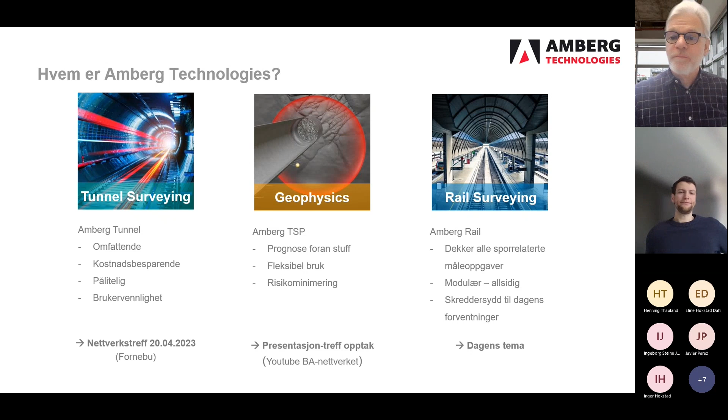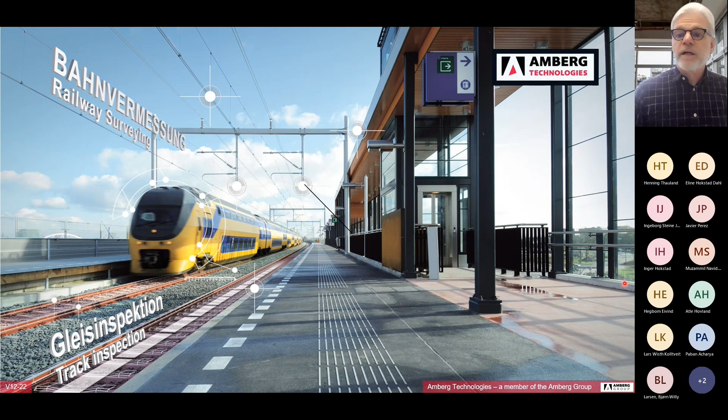I will share my display with you. Today I'm going to present you... I hope you can see what I can see. All good. I just quickly want to switch off my camera to save a little bit on the connection. Yes, here we are, perfect.

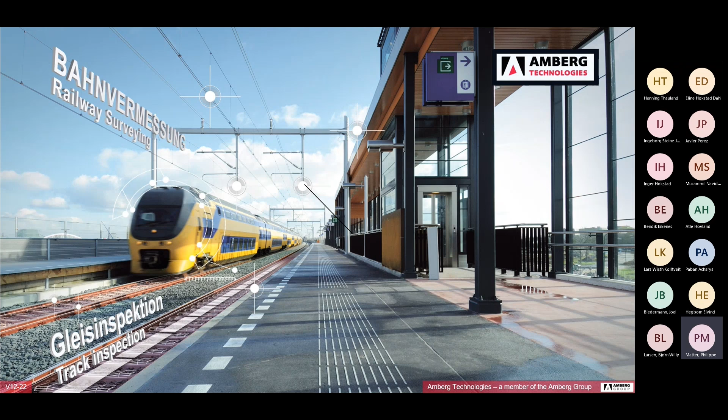Welcome to Amberg Technologies. Today, like Joël mentioned, the topic is rail. Rail survey and track inspection tools from Amberg Survey, from Amberg Technologies. Amberg Rail means better track performance, less maintenance, and subsequently saving money. I'm going to show you a few applications which I believe are relevant for Norway.

I'll dig right into it. Just to give you a quick background of Amberg Technologies, we were founded in 1966 by the senior Rudolf Amberg, now led by his son Felix Amberg. You can see we have about 20 years of history in track and track inspection, track maintenance works.

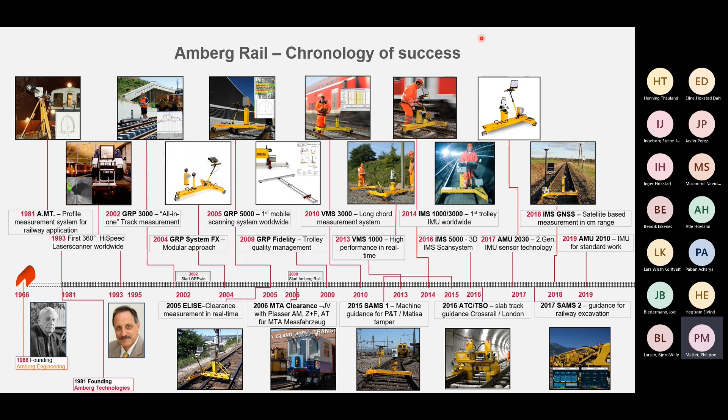How does it look? What is our offering for the market in rail? Here we go, so let's look a bit. It's a bit, how should I say it, it's complex here in what I show, but I will go into each detail.

We have two parts. We have our GRP, which is a track trolley, a track measurement system, which can perform various applications such as survey, tamping applications, clearance, and inspections. We have a platform called Amberg Rail, which is the application where everything happens, the Holy Grail. We'll see what it is.

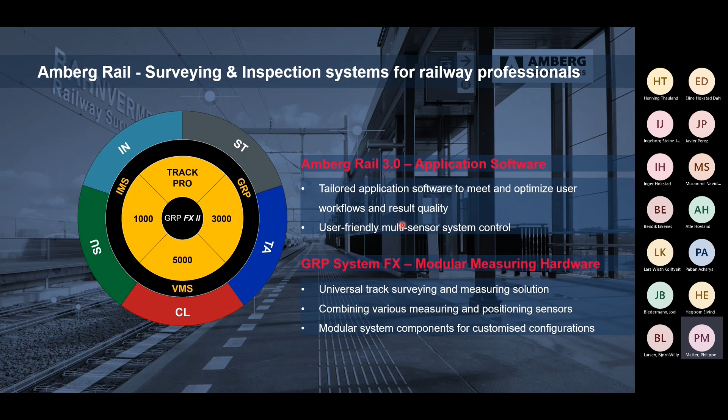And then there's the system called GRP-FX, a modular hardware measuring system. This is the way it looks. We'll go into more detail about the module. It's modular, our hardware part is modular, it's scalable, you can upgrade it, and it's been proven for over 20 years. We have constantly innovated and adapted all the hardware components and firmware at the same time.

On the other hand, we have Amberg Rail, like I mentioned, it is our software platform. Amberg Technology is predominantly a software company. Yes, we need some data providers, which in this case are our trolley with all the sensors, plus total stations and GNSS from Leica Geosystems. We can exclusively only work with Leica Geosystems, meaning the Leica total station will transfer the geodetic information directly to the trolley. So that's about the data providers.

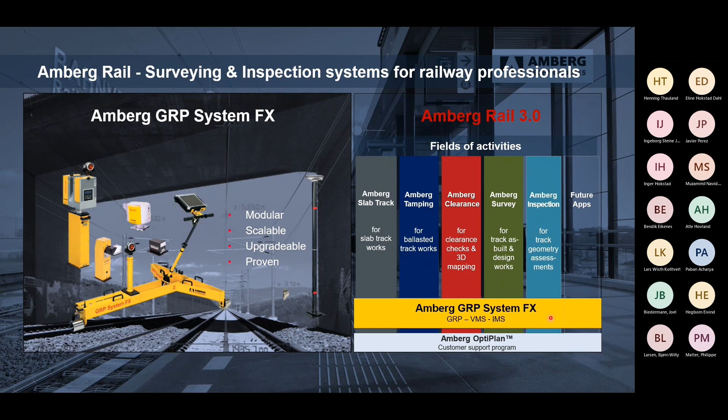Back to software, we have a software called Amberg Rail, which has various applications, and the various applications will result in various configurations of the trolley. Let's go quickly into these individually.

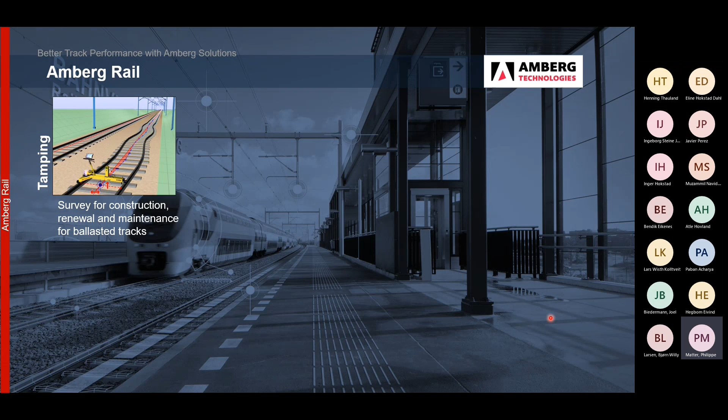So Amberg Rail, we have tamping. Tamping is most probably one of the classics in Norway, and not only Norway, but around the world. There are many thousands of kilometers of tracks which are ballasted tracks. Ballasted tracks need regular maintenance. So we have an application called Amberg Tamping. It's for construction, renewal, and maintaining ballasted track. The trolley will look approximately like this.

We'll go a little bit more into detail on each of those applications. Then we have slab track. Classic slab track is used in the Follo Line tunnel. Normally in today's tunnels you don't put ballasted tracks because it's a bit difficult to maintain ballasted tracks in a confined space such as a tunnel. So therefore you tend today to go for slab track. Slab track's big advantage is you don't need a lot of maintenance, except the rail head needs to be checked once in a while. Eventually you need to replace a rail, but basically a slab track doesn't need maintenance over several years.

So we have a slab track application for surveying, and of course to lay the tracks, and for maintenance work when you replace a track or a rail, for example. A typical configuration is our GRP 1000. We'll see that a bit later.

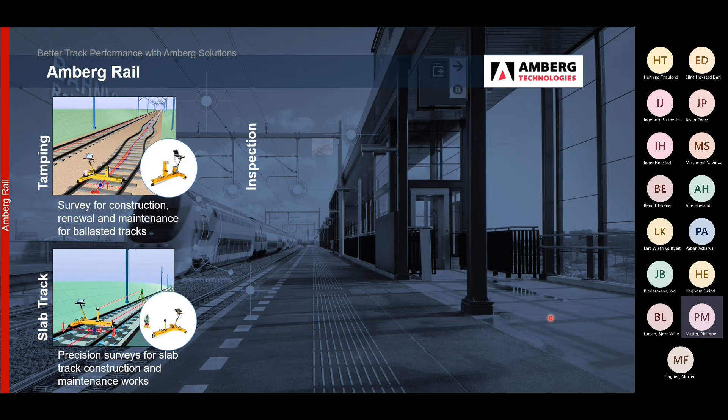The next would be inspection. Inspection is classic, it is for track geometry. Here we only assess the track geometry. It is used to plan a new track or to assess a track when we don't have any information about it. So it's classic inspection, we'll see that a bit later. Here a very basic configuration - it looks basic, it's not as basic as it looks, but we'll come to that later.

Then we have survey. This is classic 3D, now we're talking geodesy. We want to know where does the track lie, where are all the encroachments, where is that pillar, where is the bridge starting, etc. So it's to plan and for site preparation - for example, for a track or a tamping job, you want to do a survey before you then do the tamping job. And last, but most complicated, that's a typical configuration.

And last is clearance. Now we're talking of a series of sensors, of captors. It's for mobile 3D scanning, documentation for BIM, clearance gauging, etc. That is basically the heaviest configuration, and it is dedicated to clearance, measurements, and mapping in tunnels or along the track.

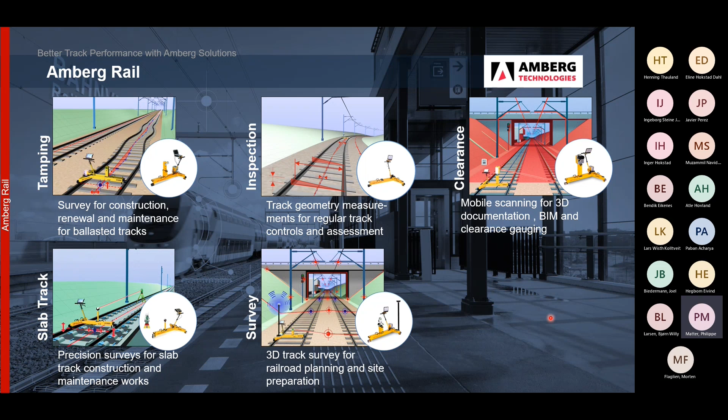Now, going back to measuring the platform, the multi-sensor platform. This is the base which is relevant for all configurations and all applications. It's the trolley, which consists of a central sensor board, which is somewhere in here - you don't see it. It has an odometer, which is placed here, and it has a gauge measurement system which is highly precise - the gauge goes plus minus 0.3 millimeter.

And the next would be a cant sensor, which can do a cant super elevation of plus minus 10 degrees, which is relevant to plus minus 260 millimeter, at a static accuracy of 0.5 millimeter and kinematic accuracy of plus minus 1 millimeter. So this is the base of all configurations - all these sensors are always active and taken into consideration when you do any survey on the track.

Now we need to configure that a little bit. Oh, of course there's a battery system - of course everything needs to work independently. We can take the power from above, but many lines are diesel, tracks are not electrified. So yes, we have an integrated battery system. We'll come to that right away.

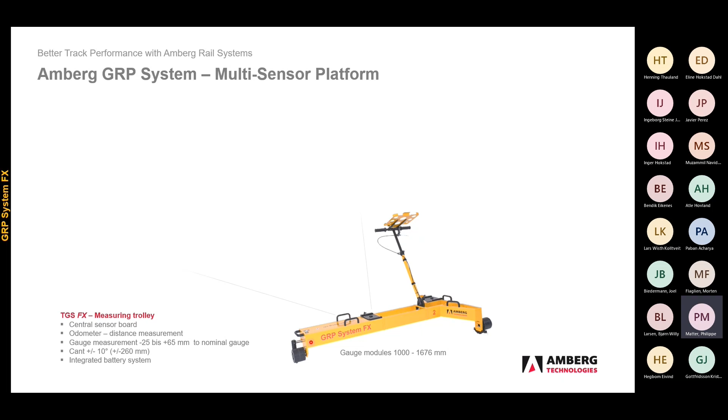Now, take for example, we have several add-ons: a prism column, a profiler, total stations with automatic tribrach, a battery system for the various scanners. So we're talking scalability here. Depending on what kind of job you need to do - for clearance, clearly you can do it with a profiler, but if it's a long tunnel you'd rather go for scanners. And as I said, you need to be independent, so here we have a battery system which feeds these scanners and gives an autonomy of approximately 8 hours.

Next to all these sensors, we also have the so-called AMU, Amberg Inertial Measuring Unit - we'll see what that adds to the performance of the trolley. Again, you can configure this part and add it onto the trolley when you need more performance. And of course, if you have tracks laying somewhere in the prairie with absolutely no control points, you have no idea where it is, you can use GNSS - compromising on accuracy, though at least you get a 3D information of where this track lies in the prairie.

Just to complete, we have different wheels, including tram wheels used for trolleys in the city. Tram wheels can't be that size because they're mostly embedded into the tarmac on the road, so we need smaller wheels.

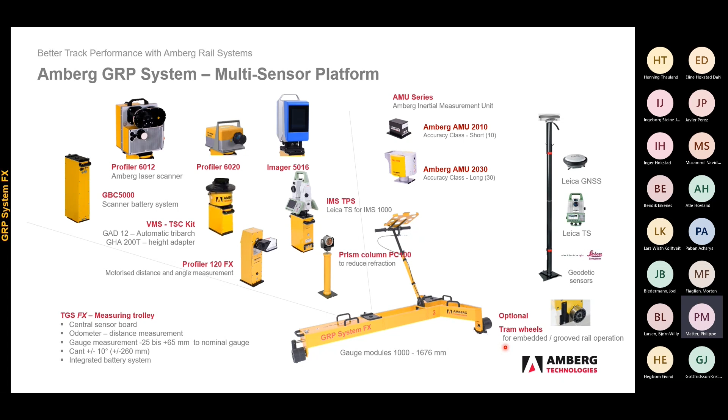We also have stainless steel wheels, typically used when you lay a slab track, because the rails are still rusty and polyethylene wheels would wear off too quickly. So we have a full set for all applications, whether it's rail or tram.

How does it work and how is that workflow? Just schematically, a small workflow: you have one computer, basically the same computer for everything, for the preparation, where you prepare your project.

In this preparation stage, you have several input features where you can input land XML, your alignments, previously acquired data of the track, or planning data for a new track—how it has to be laid, especially for slab tracks and ballasted tracks. Once everything is prepared, you move over.

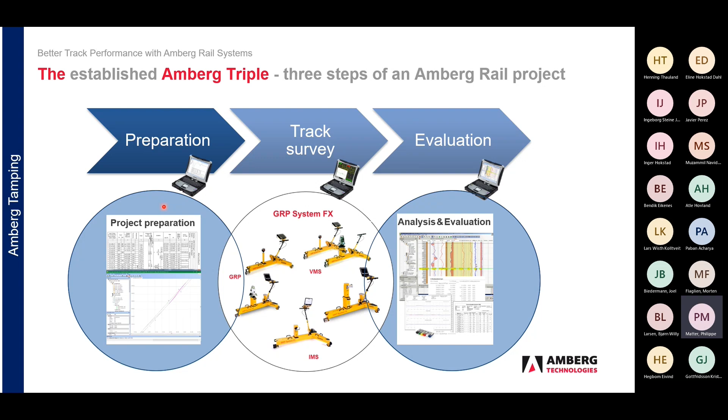You go from an office survey environment onto the track, into survey mode, on the very same computer. So we don't have to juggle data back and forth—the data is always on the same computer.

Here we have a simplified graphical user interface. A user is guided through the setup of the trolley on the track. Considering the job, you choose the respective job and then start your track survey. It's all icon-based.

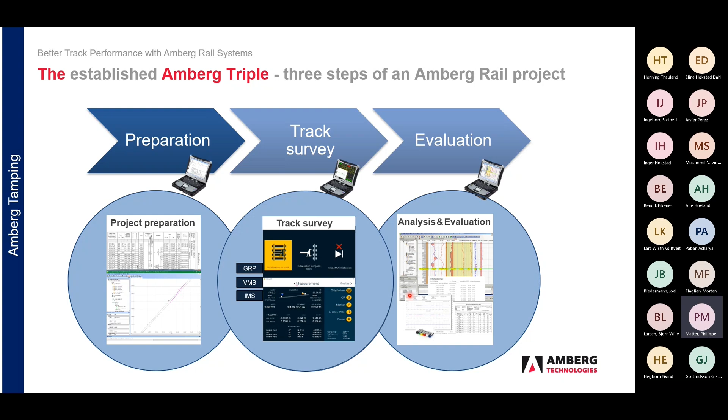I can't show too much detail, but here's a glimpse of how the track surveys look, with all information on one single display. Once the survey is done, you leave track mode and go back into office mode, where you start analyzing the measured data, comparing it with the design data, and doing evaluation—what else you do with it we'll see in the next section.

Amberg tamping is a high performance tamping survey system—a full suite to do tamping jobs in various configurations, depending on what the needs are.

The problem today is, if I remember 10 or 15 years ago, there was a train every hour from Zurich to Bern in Switzerland—today it's every half hour, and trains don't stop running at 11 at night, they run till 2 in the morning. And of course early birds want to catch a train at 5:30. So the gaps where you can actually perform track maintenance are getting smaller and smaller, plus the use—or abuse—of tracks and rails today is much more severe and intense than it used to be.

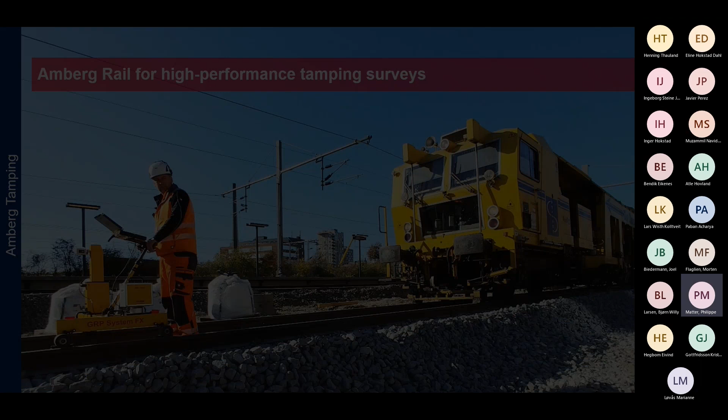So we need systems to comply with these short time windows to do maintenance. Amberg has developed a system which can gradually grow with these demands—a tamping system with scalable functionality matching the project and budget. Sometimes you don't need an IMU because you have enough time; if you don't have time, you'll most probably need an IMU to increase your productivity.

It's easy and powerful, made for the people on the track, not for surveyors, so they can easily do this tamping. It has geodetic precision without geodetic skills—you don't need that, it's done for track workers. It's solid, ruggedized, and has been proven for over 20 years in operation. We sell it all over the world and are the leader in that niche.

So there are different applications for a tamping job. You need it for renovation, ballast bed cleaning, during construction and maintenance. You want to compare the as-built—how the track lies today—with the design from 3 years ago, to see if you're still within specs or need to do some tamping. You don't necessarily have to tamp as long as you're still within limits; you can compare to design or previous measurements as the reference for today's as-built, along with track geometry inspection, etc.

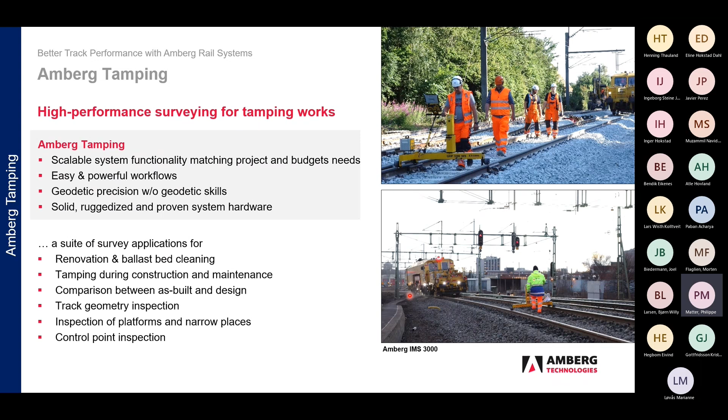Inspection of platforms and narrow spaces can all be done with the very same application called Amberg tamping. And of course, you can also do control points at the same time, and inspect the quality of your control points. How does it look? Here's a quick example of 3 different configurations.

3 different configurations, starting with the basic one, the GRP 1000, which in connection with an Amberg, with the Leica total station, will give you a geodetic survey compared to a track survey.

It is a geodetic survey using a total station in a basic configuration. Then we have a long chord measuring system, which we still offer, though we don't sell it much anymore these days because we have the IMS, an inertial measuring unit, where you only need one person.

The biggest difference here, you can see different configurations. Of course, it will be a different application. Still the same trolley, still the same base. The difference is here, you can see the performance. It's about performance

of the track. Like I said, if you don't have a big window at night to do a track survey, if you have to maintain a piece of ballasted track within 4 or 5 hours, you'd rather do it in one night using an IMS than have it take 5 nights using only a GRP. But again, it comes down to the requirements, the budget, etc.

So these are the different systems you can use for the application tamping, and that's the configuration you would require to perform this tamping application.

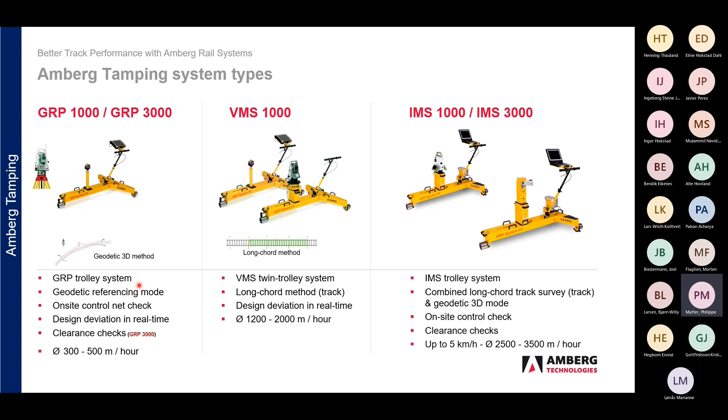This is a new system which we are offering. It's one system, a high performance tamping survey with an IMU. I'll go quickly through what it gives you, what possibilities it offers.

We have 2 different IMUs, a small one, a little black box - that's a real black box here - and the more performing one. You can see the different sections. You can do up to 200, 300 meters with the bigger one, and only 120 meters with the smaller one, bearing the same accuracy, of course. Always talking about precision as well.

You can add control point measuring devices, either a profiler or a total station, and then it's called IMS 3000. That's technical, I don't want to go into too much detail. And of course, it has a battery system for 10 hours autonomy. And of course, like I mentioned, it's always in connection with the respective software for the job you need to do.

In this case, it would be a tamping job. Important, I can't emphasize enough, it's about performance. With this kind of configuration, we can typically do between 2,500 and 3,500 meters per hour.

It can go up to 5 kilometers, but then everything needs to be an extremely perfect team, and everything needs to be perfect. We'd rather say somewhere between 2.5 and 3 kilometers per hour. So if you have a 5-hour gap at night, you can say we can do around 10 to 12 kilometers in one night shift.

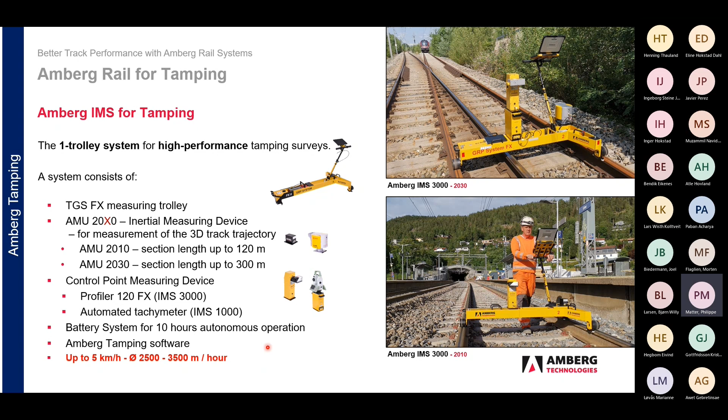So here's quickly just a little overview of our IMU family. We started in 2012. We were the first ones offering an IMU for track measurements.

Importantly, an IMU is also very, very important when you have to do measurements where we cannot do any geodetic measurements, for example in the Middle East. During the day, you have too much refraction, so you would lose connection between the prism and the total station, and the IMU solves that problem.

So in 2012, in the Middle East, they were doing a lot of track works, laying new tracks, and they had big issues with refraction, so the IMU was very helpful for them at the time.

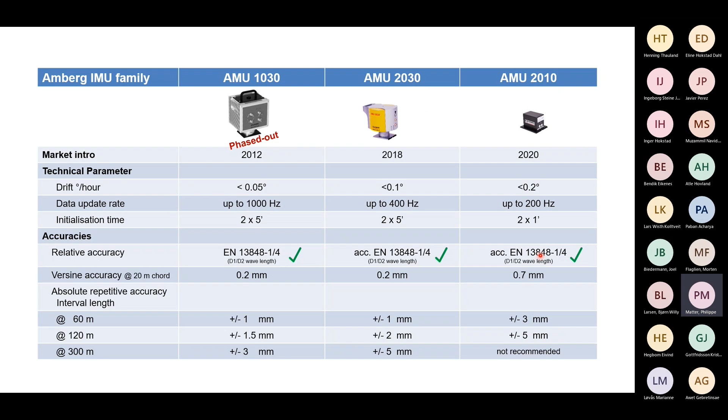And of course, today we are offering the IMU, or AMU, the Amberg measuring unit - the AMU 2030 and the 2010. I don't want to go into too much detail, but these are our offerings today. Just a quick look at what the difference is here.

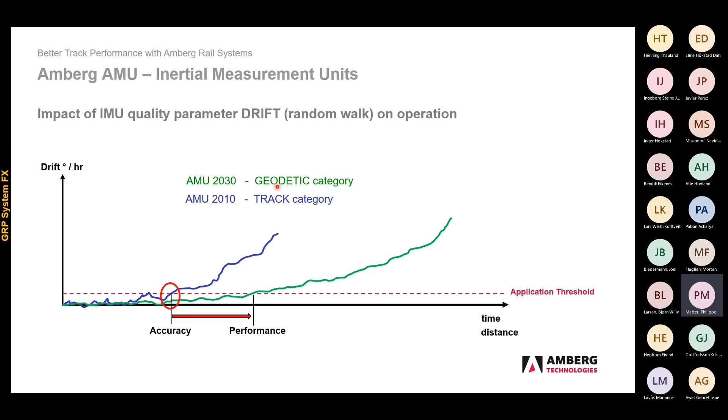We have here quickly a comparison between the 2010 and the 2030. You can see with the 2010, up to that point, we have the same accuracy, then we lose accuracy, but for the same accuracy, we gain performance when we use the 2030 IMU. Just to give you a little graphical understanding of what we mean by getting more performance out of it.

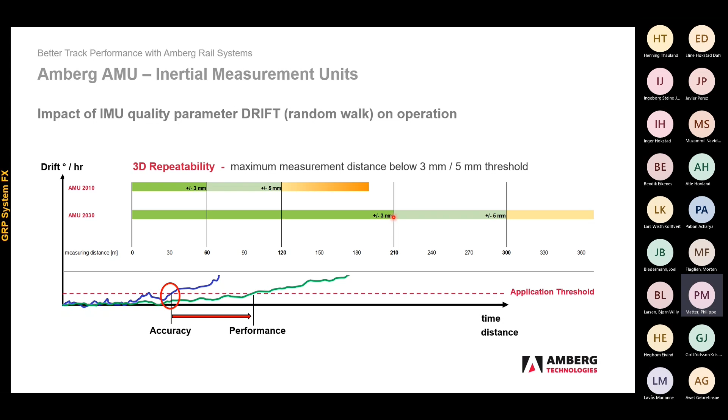Repeatability on 60 meter, we get the same with the big IMU on 210 meter. That is important when you don't have a highly dense control point network along the track, so that could help you overcome that as well.

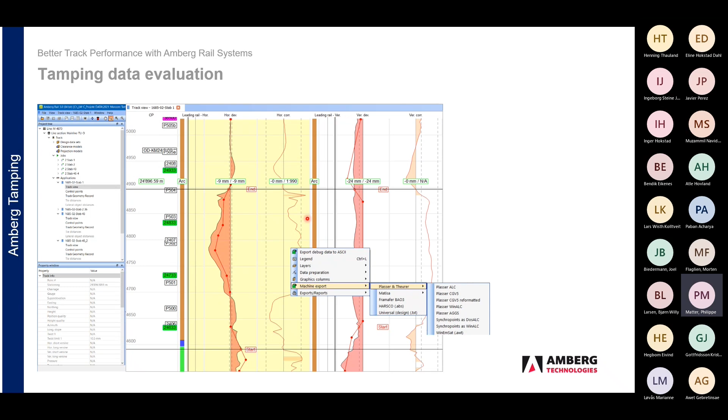Once it's done, all is evaluated, you create the data and export that to the machines. As you can see here, we work with all major tamping machine manufacturers, Plasser & Theurer, of course, the number one, the leading in the world, with their various control systems. So we can adapt very simply to the machines, and then we can simply export that through a USB stick.

Usually on site, in front of the machine, you do the as-built, compare that with your design, and calculate the correction factors and values, and hand it over to the machine. The machine does its job, and you do a survey behind the machine to confirm that everything has been done, hopefully in one run. Otherwise, the machine has to do a second run.

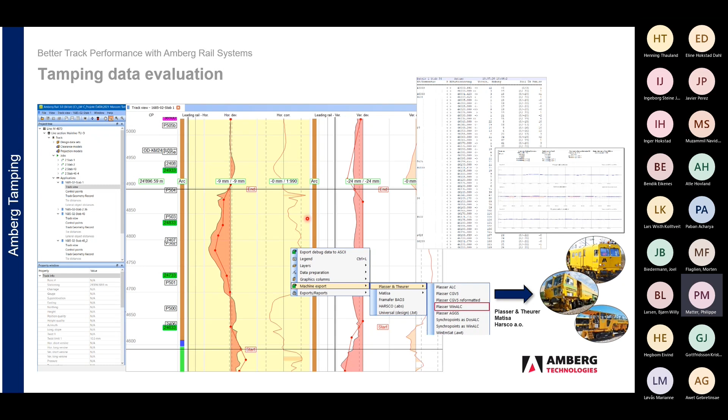That was it for the tamping. Now, Amberg Inspection. It is for track geometry. We want to understand, how does my track look like? So this is track geometry.

The system, you see a very basic configuration. Again, the trolley with the 3 sensors: odometer, cant, and gauge sensor. And in this case, we have a so-called IMS. This is a relative measurement system. It offers full productivity from day one. It's robust, I don't want to go into too many details.

One-man operation, that's super cool. You don't need 2 people because it's a track-based system, it's not a geodetic system. So you don't need to have a total station which follows the trolley. It's a very simple process.

Of course, you need measurement-relevant track geometry quality precision according to the European standards, the 13848-4. And of course, it is flexible, it can export the data, etc. For us, it is basic information to get how does my track look like.

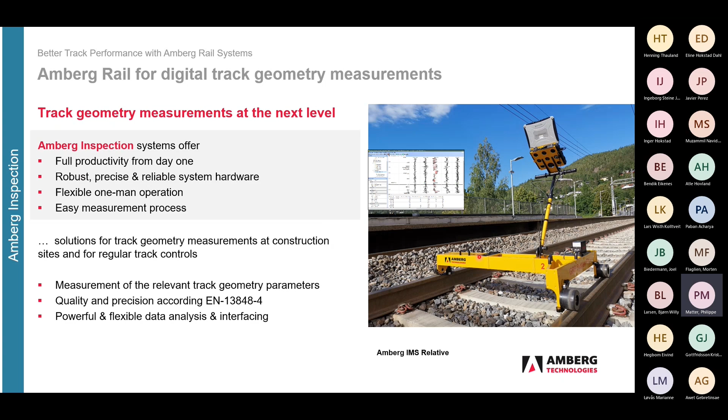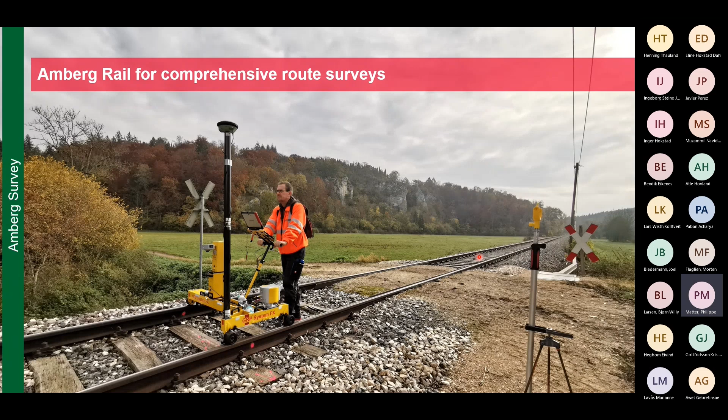That's about Amberg Inspection. Then the next will be Amberg Survey. Now, in survey, there's a big mistake on that image. You can see this gentleman, my colleague, doesn't wear a helmet.

So always wear a helmet like my other 2 colleagues here. A helmet needs to be worn on a track, but sometimes for purpose, for big picture taking purposes, they forget to put on the helmet. But basically, that's the way you have to look on the track. Yellow or orange, depends a little bit on the country. If you go to the Netherlands, it has to be yellow, orange is not allowed, but that's a little detail.

So as-built route, we have a system configuration here. You can use, when you want to do the 3D track surveys, either control points or GNSS-based track survey. Needless to say that GNSS would never be as accurate as a control point, but it is a start. When you want to have 3D track information, you can use GNSS.

It's an easy workflow. Like I said, it's made for the track workers, and you don't need to be a surveyor. High output and low traffic impact, you don't have impact on traffic. I don't want to go into too much detail.

It's very comprehensive. You can do much more than just track works or track survey. You can also set up control points, and you can intensify your control point network while you do your track assessment.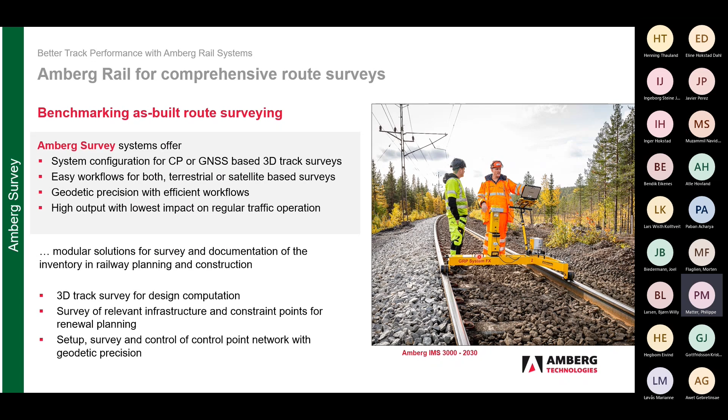Typical configurations here, they look similar. As you can see, they look similar. Again, the configuration doesn't necessarily describe what kind of application can be run. At the same time, you can see that with one configuration, you can run different applications.

As we saw before, you can do a basic inspection. You can do here a survey with this kind of configuration, and you'll see later the same configuration can be used to lay slab track. So the configuration does not necessarily tell you what you can do with it. You can do a lot with one configuration, up to 3 different jobs.

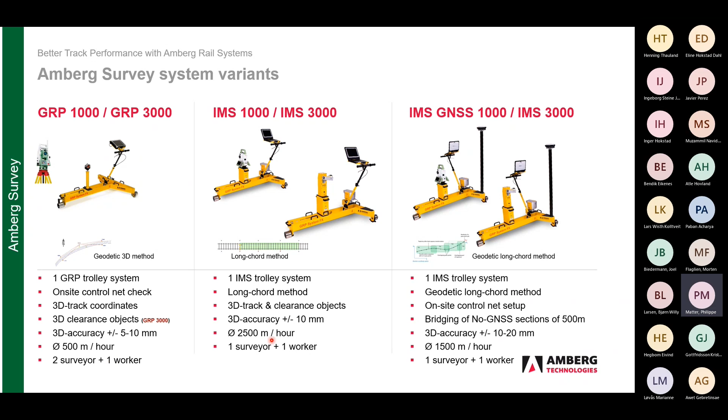So here again, we're talking about productivity. Here, that's a result. This is kind of inventory data you get.

Needless to say, you can take any annotation, any point along the track. You can measure an encroachment, or identify what something is, like the platform edge or an electric box with wiring, or a bracket. I can stop the trolley, aim my total station or laser pointer at it, measure it, and enter text describing exactly what it is. It will carry the stationing and the 3D information of that point, and you can refer back to that in your analysis.

So you get a total inventory of what lies around your track. And you can see we have different exports: Land XML, DXF, ASCII. So for you, it's very, very flexible.

It's not only about the track itself. Here, for example, you have different points with 3D information, and then remarks. What does that mean? That's a T mark on a concrete mast, with all the little details noted. You're free to enter any text. So it gives you total inventory along the track, plus all the track information.

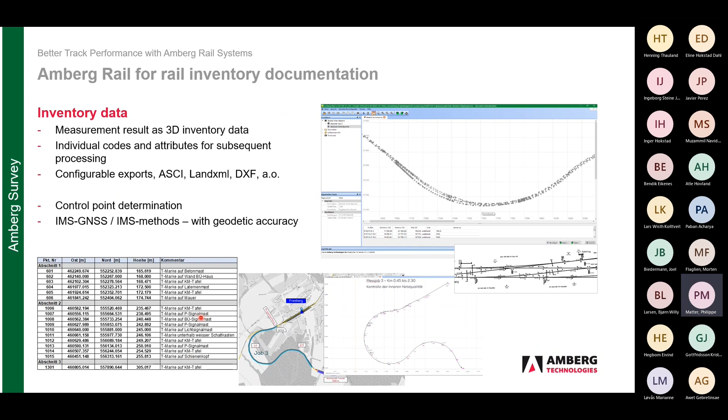After the survey, of course, we go to the top notch here. It is Amberg Clearance, for mapping and clearance gauging. Here you see a good example.

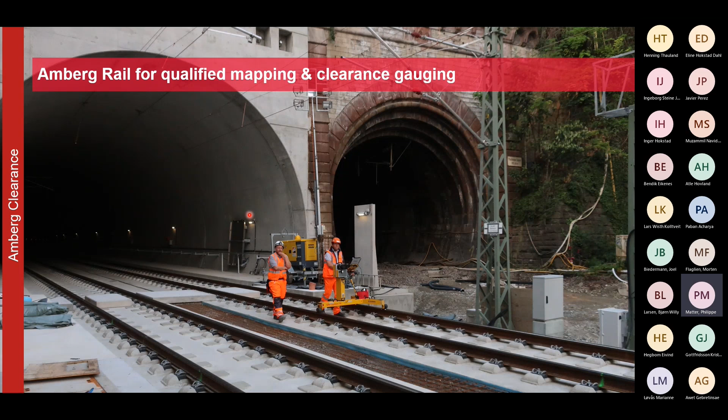Like I mentioned, in most tunnels, such as the Follo Line, you have slab track. This is the new tunnel, and this is an older tunnel which had ballasted tracks at the time. That tunnel, I can't exactly say which one, I think it's somewhere in Germany, but you can see that's the old days. These are the new days using slab track, and you have to make sure everything is fine for a safe passage of the train. These guys are doing a fantastic job.

Again, these guys not as fantastic, they're not wearing helmets, but I've mentioned that already. It's a scalable system with different scanners, as I will show you right now.

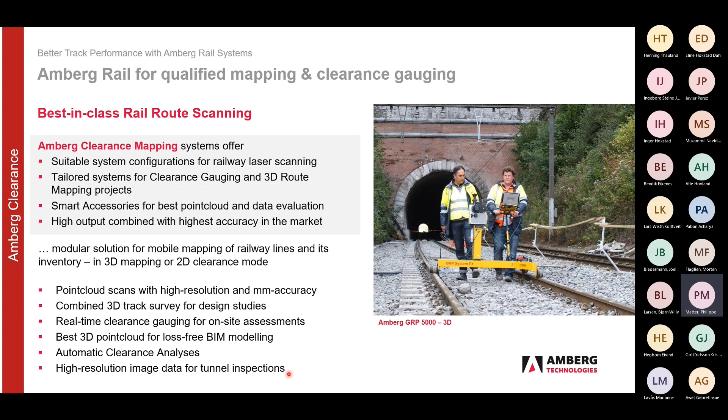Yeah, the data is important as well. These scans can also be used for tunnel inspections afterwards, which have nothing to do with the track. The basic job in Amberg Clearance is really to see if I have proper clearance for a safe passage of the train at different envelopes. So inventory scanning can be done as well.

Single trolley configuration, and you can do referencing with a tachymeter or with an IMU unit. You can also do the registration later on using black and white targets which you pick up along the track. So you have full flexibility.

So it consists of the trolley and different scanners, I'll come to that, we have different scanners you can go for, and of course the IMU, smaller ones and the high performance one, and of course even GNSS if needed.

If you don't, people go like, oh, in a tunnel you cannot do GNSS. Yes, but in an environment like here, when you're outdoors and want to control the station, the platform edge, etc., the edge of the roof, you still have GNSS operations possible, using a scanner to do all the clearance job.

And of course, the battery lasts about 8 hours, quite a high performance battery, sitting on the lower end of the trolley. Needless to say, for night operations we have integrated lighting, etc.

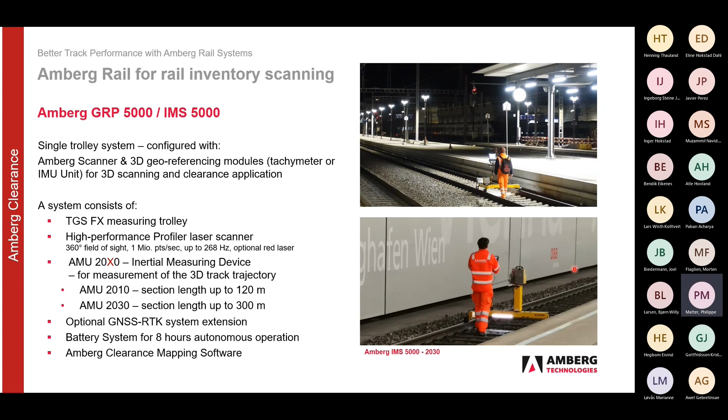And of course, with this configuration you would need the clearance mapping software, which runs here. That's the configuration, we call it GRP 5000. 5000 will always mean clearance, it will always mean there is some sort of scanner on top of the trolley.

I'll come to the next slide and show you the different scanners, again, performance and whatever is needed from the customer. I don't want to go into too much detail on all these configurations, because it can be overwhelming to see how flexible and how various the configurations you can do with our trolleys.

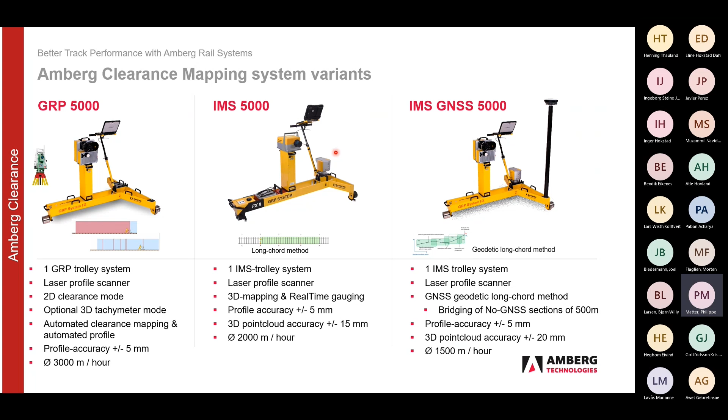Here, that's the offering we have, the 3 scanners offering. The biggest difference, I have a mistake on this one, don't know if someone recognized that. This one has only 320 visibility with the imager, so you won't see the ballast, you won't see between the two rails.

Though, on the other hand, you can use it on the tripod. So we have a lot of customers using existing HDS 6000, 7000 from Z+F, or Imager 5016, old ones from Z+F. They can also use it as a tripod standalone mode.

If you want to see between the tracks, see the ballast, see the writing, identify the safety devices between the tracks, you would rather go for a scanner which has a visibility of 360. This is not a scanner, we call it a profiler in this case.

Here we have two offerings, both not Amberg scanners. We don't produce scanners, we are a software company. These are the Z+F scanners, and with the latest development, the rotation speed is quite immense, 268 rotations per second. So you pick up an enormous amount of information, each second producing 1.1 million points at very good accuracy.

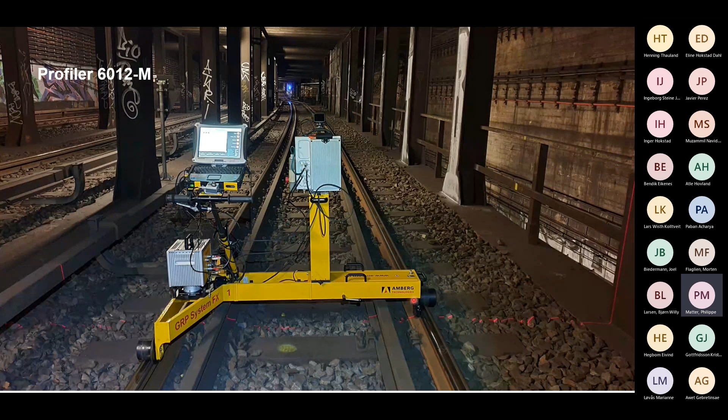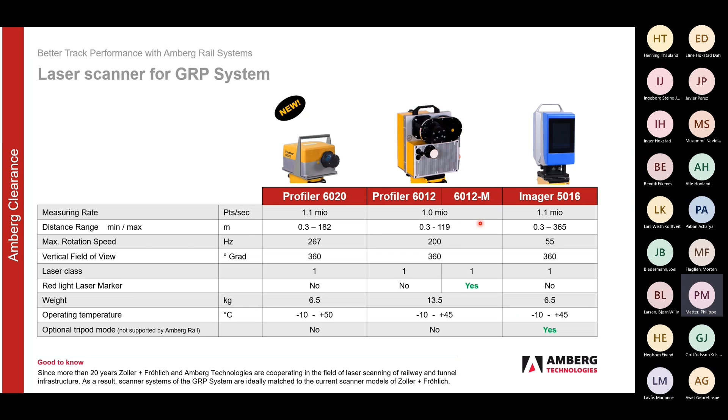Here's a typical application, a Profiler 6012 with an IMU, the older IMU at the time. In the newer system there will be less cabling. These are rather old images. Here, nicely to see, this is the scanner with a visible red laser. This scanner can offer a visible laser, all the others are invisible laser.

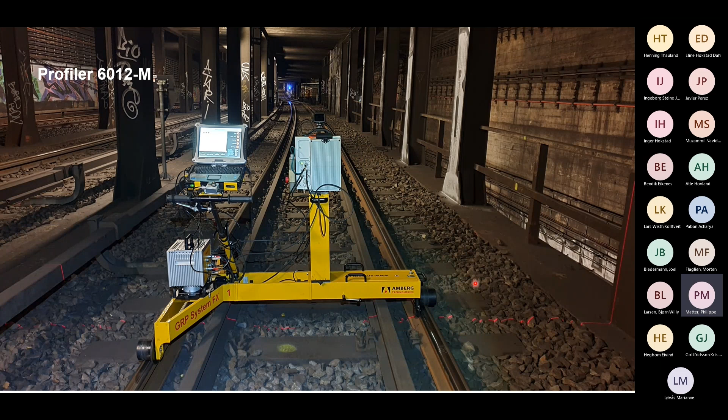Sometimes you want to know exactly where you are measuring, so you could opt for the M version, the 6012 M scanner, where you can see where your scanner is. And here it just gives you information.

These are the kind of results you get out of it. You get real-time information on encroachments, a real-time visualization of your profile. You select, you set up your envelope according to your rolling stock and the tolerances you have, and it gives you exact information at each stationing. It's online, so as long as you move on the track, these things will change constantly.

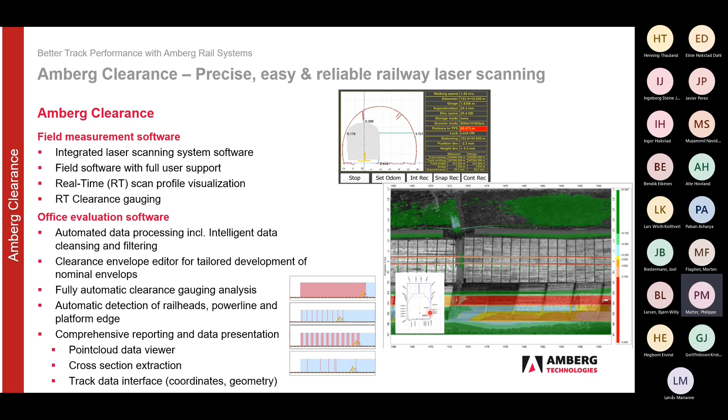It will give you information on encroachments. There are several ways to do it: continuous, stop and go versions, etc. These are the visualizations then later on, and it can give you exactly at which stationing you have to be careful. Here, a little indicator will show in red that something will endanger the safe passage of the train.

Of course, we're also working on an analysis object, the railhead for example. These are the kind of results you can get out. Most important for people today are track, platform edges, and of course tunnel railhead analysis and platform analysis. These are all information you can extract from the generated point clouds.

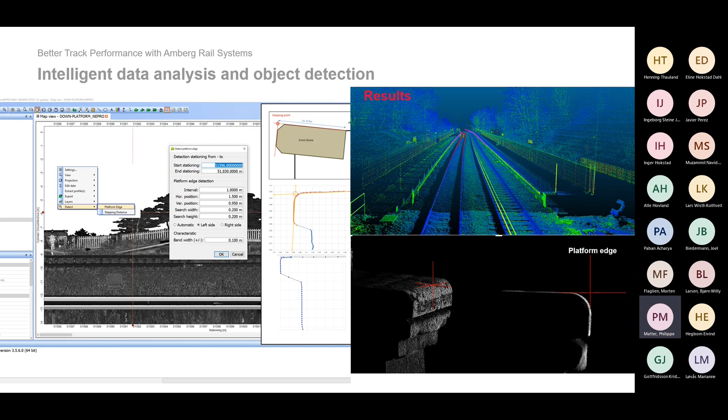Here's a nice visibility. And here, for example, that would be a typical application using additionally a GNSS, if you don't have enough control points to bridge the control point gaps, to have a GNSS so that at least you have 3D information along the track while still scanning.

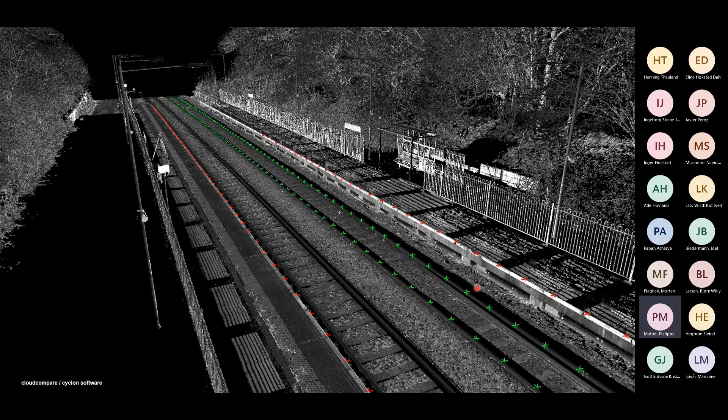Here you have then, for example, identifying the fixing point of the track, of the rail, etc. That's a top view. So our software can do all of this kind of operations, all kinds of jobs.

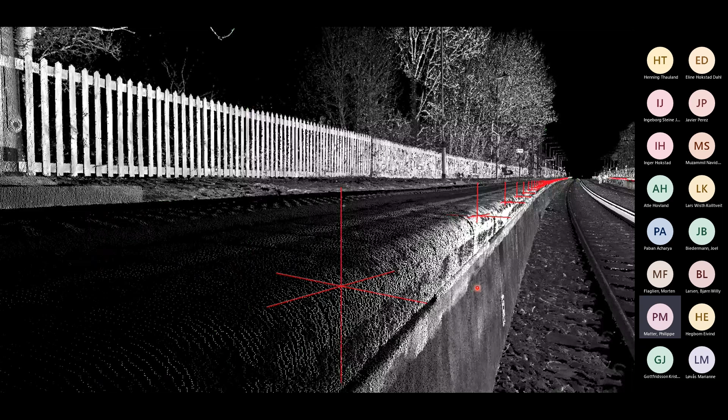Just a few screenshots of what you can achieve with this kind of setup. Of course, it requires a bit of knowledge how to use it, how to set it up, and then to interpret the data properly. But it's quite amazing what you can get out of the information of just one passage—not only the track and how it lays, but how it's relative to the platform edge or to the tunnel walls.

Here, these are results which can then be exported into a BIM, so retro BIM and as-built. You can export and exchange the data in PTS, LAS files, etc. So these are all the possibilities based on the data acquisition in a tunnel with Amberg GRP or IMS 5000 clearance.

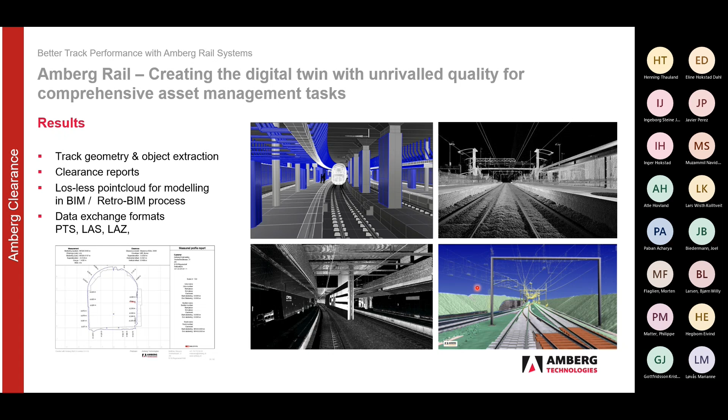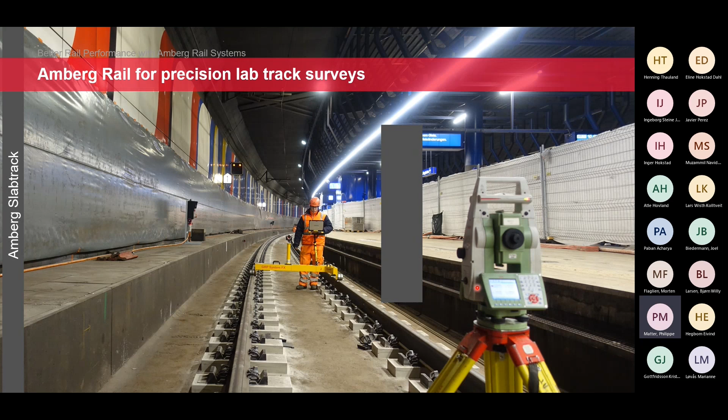So we leave clearance and move on to slab track. As you have in the following line, slab track, like I said, is for measuring data, to lay the tracks, and of course to analyze or do as-builts of tracks.

Here's a typical application. You see here the basic configuration of our trolley with the simple prism column and the prism, which is tracked by a total station from Leica, preferably a one-second or even better half-second instrument. You can see here this little antenna. The total station sends its 3D information constantly to the trolley, which processes it with all the track geometry information onto the computer. So everything is on one platform, and you can lay the tracks in a very simple way.

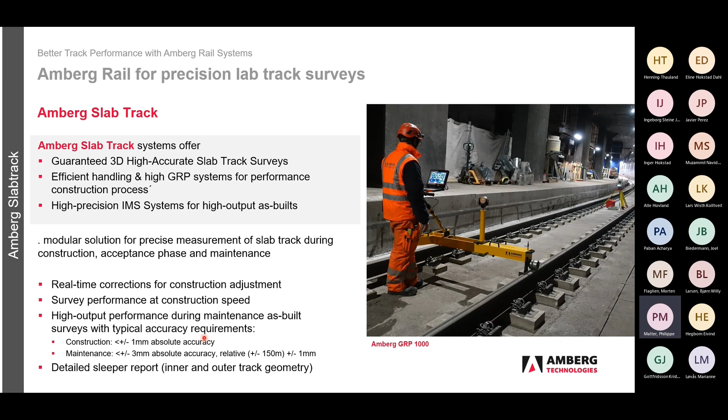This is designed for the track workers and not for surveyors. You can see here, you get the absolute accuracy during construction time. That's the application you can do with an IMS or a GRP.

Again here, you see performance. It's about performance. The moment you see an IMS, you can check the performance. An IMS has a much higher performance than if you do it in geodetics in a standard way. You can barely see the total station here, which communicates, locks onto the prism, and sends its trajectory and position information through the little antenna to the system. So they're constantly in communication.

As a principle, you would always need to relocate the total station, do a resection, lock onto the prism, and then continue working. That's more tedious work, but it does the job. Maybe not as critical in construction, it's more critical performance when you have a live track and you don't get much track time.

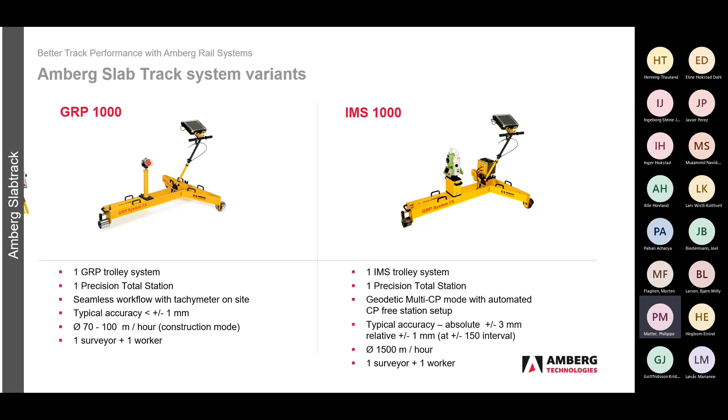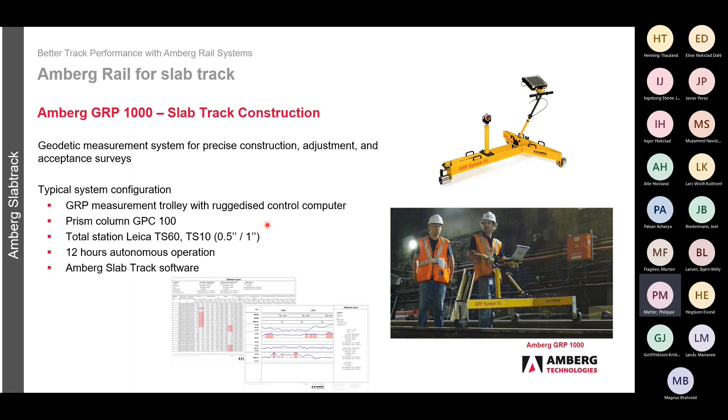Here's a quick insight when you do track works, like configuration or slab track construction, with 12 hours you can work. Like I said, we prefer, or you should prefer, one-second or even half-second instruments. If you buy half-second instruments, of course you make Leica happy, because they sell a high-performance total station with high accuracy.

Here's some as-built assessments afterwards, nicely indicated in a tabular version, or in a graphical version with the places you have your chainage, and you see exactly where you have not met the requirements, so you have to go back and do reassessment, shimming, etc.

I found one example interesting in Norway. The Follo Line was laid by an Italian contractor. He brought the Amberg trolley and did that. You can find that on the internet, a nice picture of that Follo Line.

I remember I sold once the GRP 5000 to Oslo Tunnelbane, or Metro - I call it Metro, I think it's Tunnelbane. I don't exactly know what happens to that. Somewhere we also sold a GRP 1000. It's difficult to understand where exactly what happened with those trolleys these days.

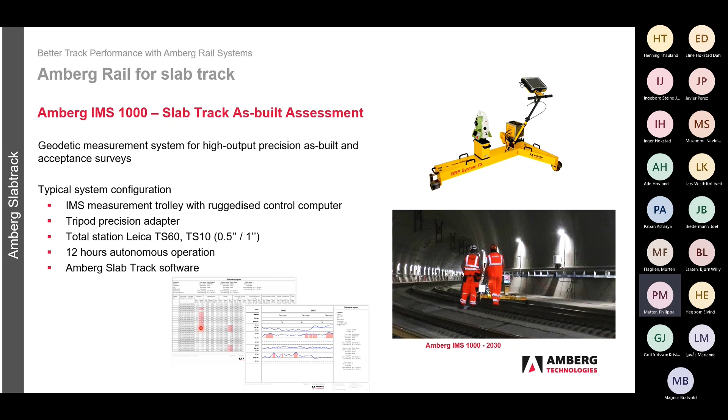But here is an example, just to give you a quick one. I don't have much on it. It was the Oslo-Drammen and Tunnel Lierasen. These are, unfortunately, I don't have the details - it's all in German. So what they did, of course, they had to...

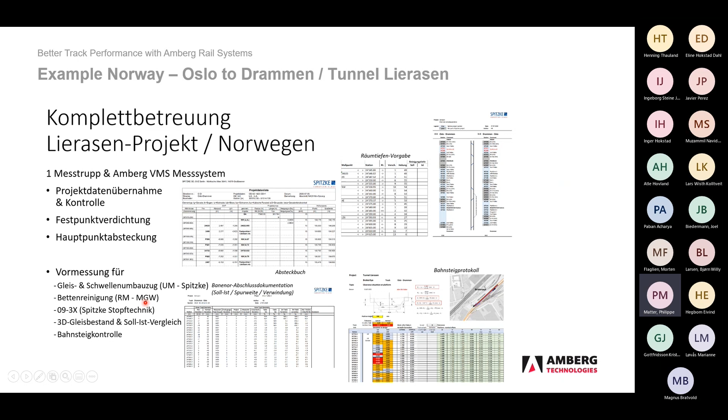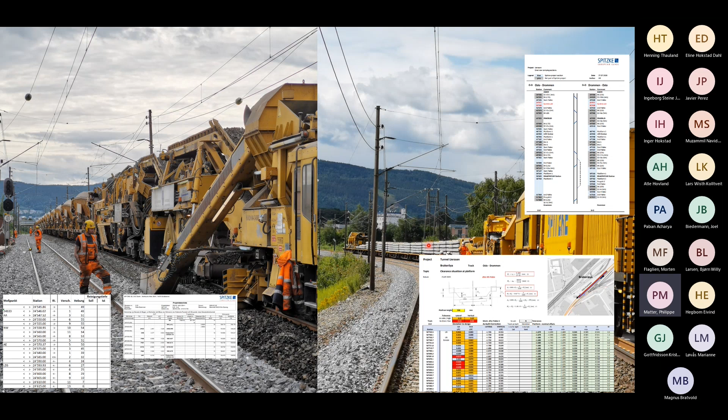Here are some examples, some images. They had to do some comparison. They need to have as-built, and then they did some renewal job. That was a company from Germany who did that job sometime - I don't have any information on when this was done. Here's some impressions of how it looked from that Lierasen tunnel.

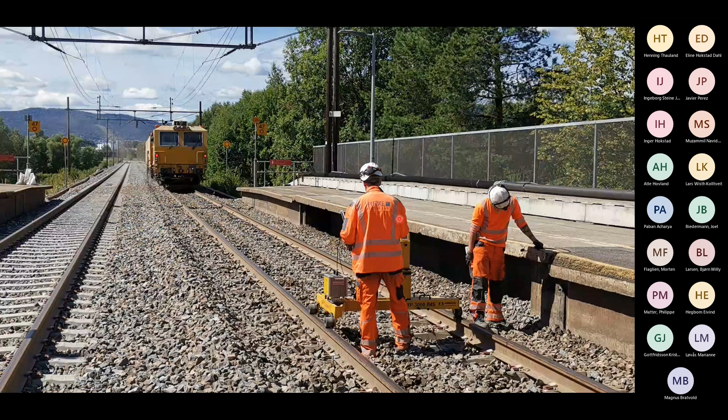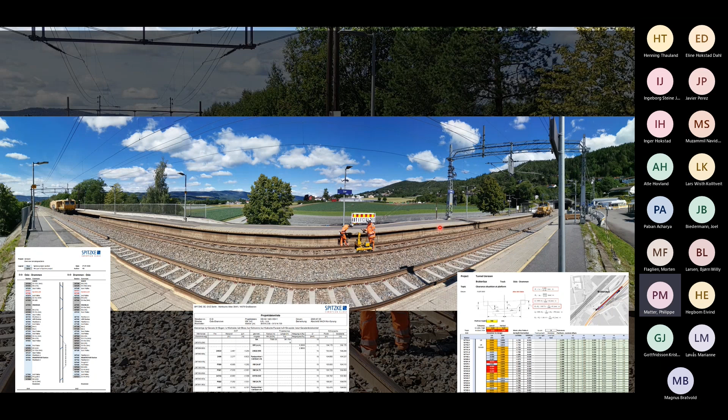So I have now, I'm absolutely good on time. So what is our value proposition for better track performance with the Amberg Rail system?

What are the benefits? It's an all-in-one platform, one source-based information. Any of the applications I just showed you - inspection, tamping, slab track, clearance - it's always the very same platform. It's called Amberg Rail 3.0. So all-in-one platform, one single source, you're minimizing errors in the field.

You don't juggle data from one application to another. You don't have to go from one computer to another - you basically stay on the same computer. It's efficient workflows, it's time saving. You have instant feedback, an instant analysis, real-time information on the track.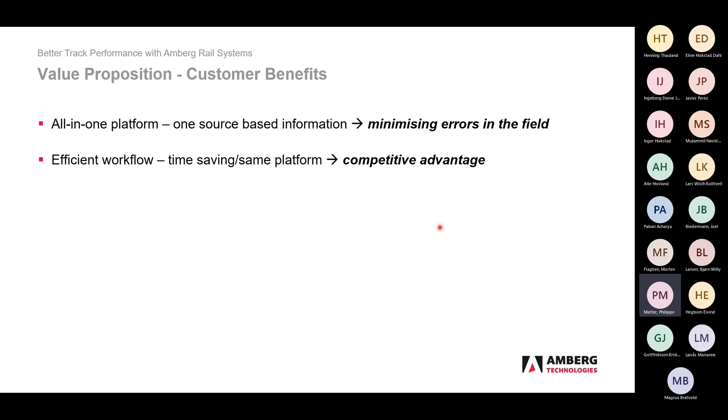And if you are a contractor doing such track works, it gives you a competitive advantage because the workflow is absolutely seamless, and it gives you an advantage for the next bid you hand in. It's user friendly, built for track people. You can make economies on expensive staff - you don't need a surveyor like in the old days where you do everything manually. You have to make sure you really measure things properly.

When we're talking high speed tracks, 250, 300 plus, in China all the tracks are laid at between 350 and 400 kilometers an hour. So we're talking millimeter accuracy in all three dimensions - northing, easting, and height - including cant. It needs to be extremely precisely laid.

We can do that without a surveyor, without survey on the track. The track staff can achieve the required accuracy easily. It's real-time processing, a seamless workflow, and it will reduce your production cost.

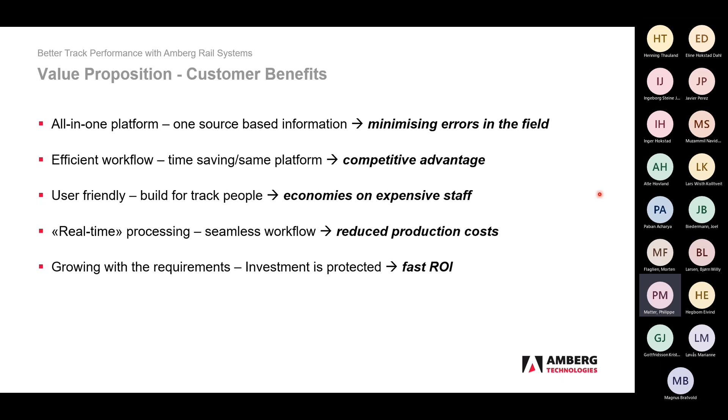And of course, it grows with your requirement. You can start very simple, and tomorrow do another job. Your investment is protected because everything is based on the same trolley - you just add new sensors on top, then complement them with software applications through a simple license. You activate that license in Amberg Rail to perform a tamping job or a survey job, whatever is needed.

The benefit for you is a fast return on investment, because your investment is protected - you're always using the same trolley. And of course, we have over 20 years of experience. We're the leader in our niche, and we comply with today's standard, the EN 13848 standard.

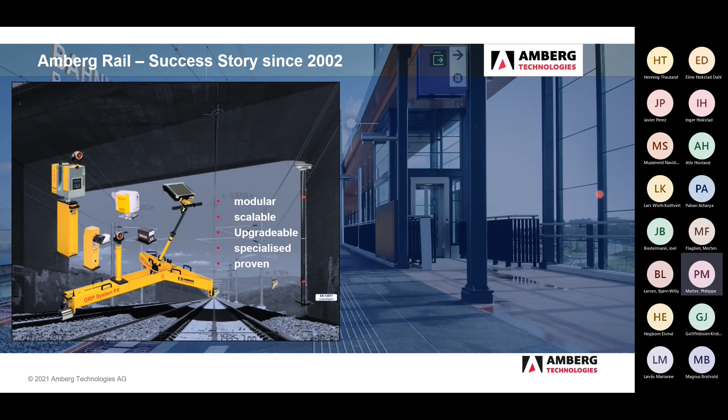To conclude, we have a success story since 2002. We have a system which is very modular, scalable - you can upgrade it. It's proven, specialized for track and track works. We have the hardware platform, the GRP system, on which you work with the respective application depending on configuration and job.

And of course, we constantly strive for new applications, for future applications, always based on the same trolley, because you will always need cant, gauge, and an odometer - these basic pieces of information on your track. They will always be needed when you do professional track works.

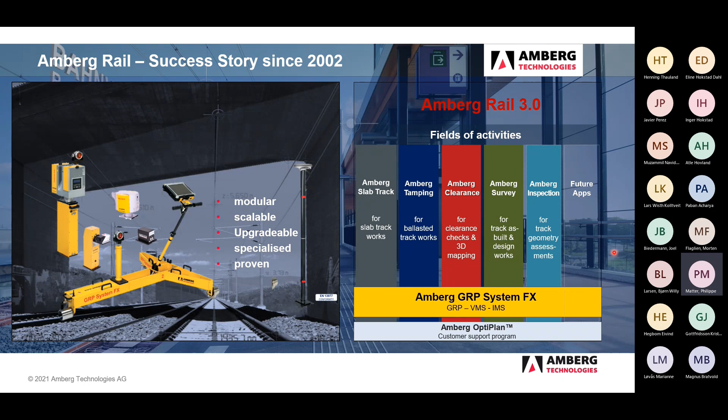And that's basically concluding my presentation. I hope I was not too fast, I hope I didn't overwhelm you too much. Here is our contact if you would like more information.

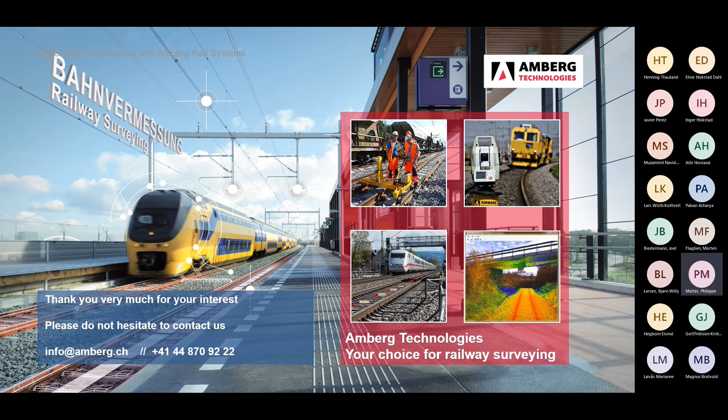Oh, it seems someone has a question here.

Thank you very much, Philippe. I must admit I was a bit overwhelmed, yes. Sorry, Inger. But I have a few questions, and I hope others have some questions too. Please use the chat or Norwegian, and I hope Joel can translate.

You mentioned a few Norwegian projects - Follobanen, Follo Line I think you called it - and Drammen, Lieråsen. I have worked with that project at Lieråsen.